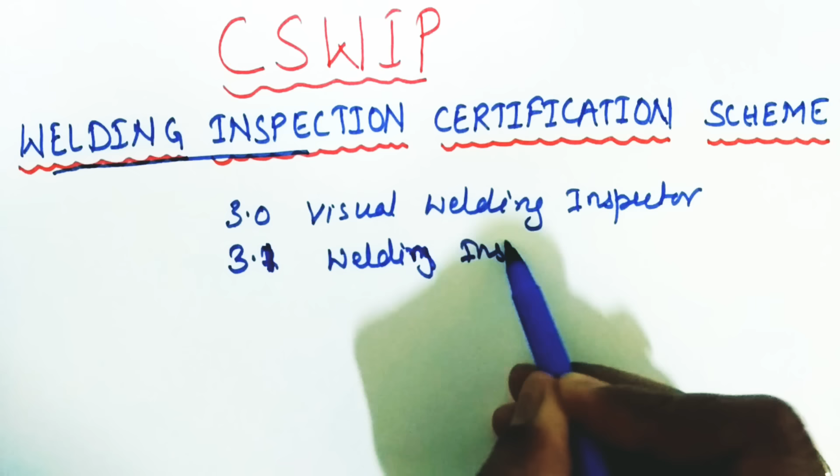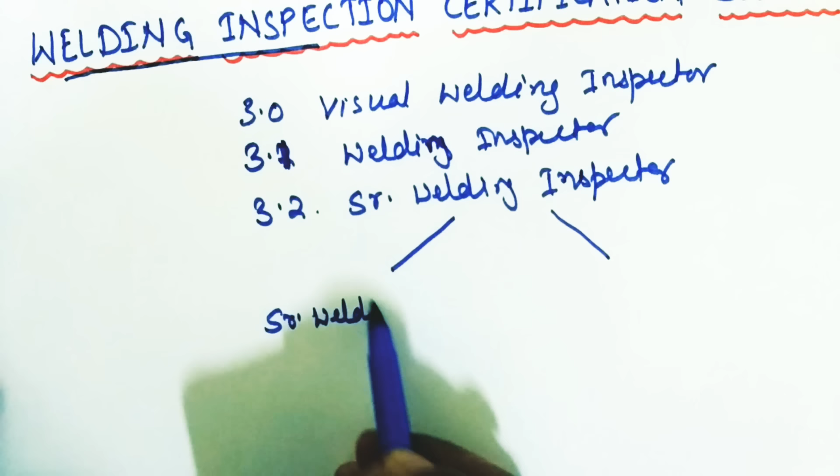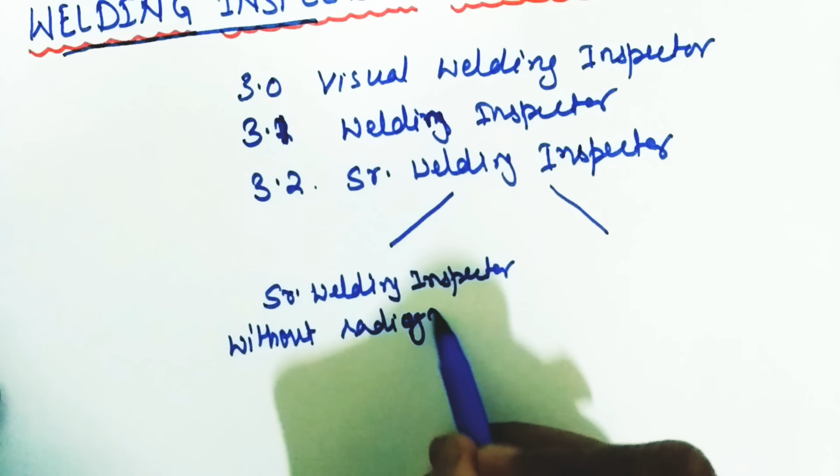And the third one is 3.2, Senior Welding Inspector. Friends, under this certification Senior Welding Inspector, we have two different certifications. The first one is Senior Welding Inspector without radiographic interpretation.

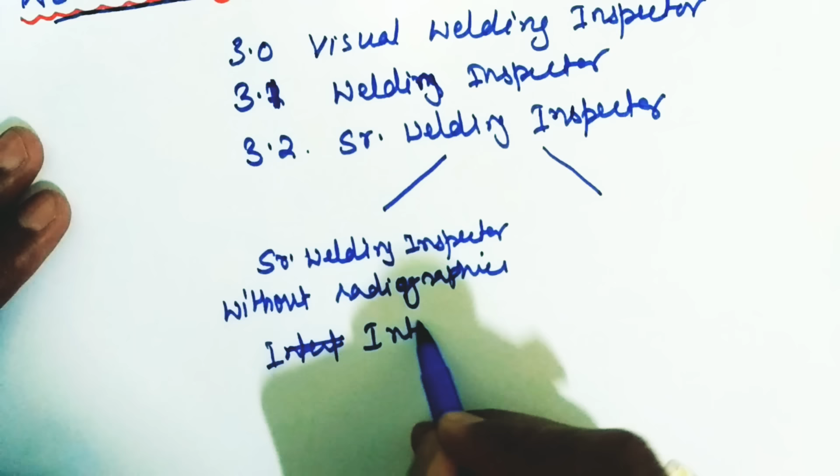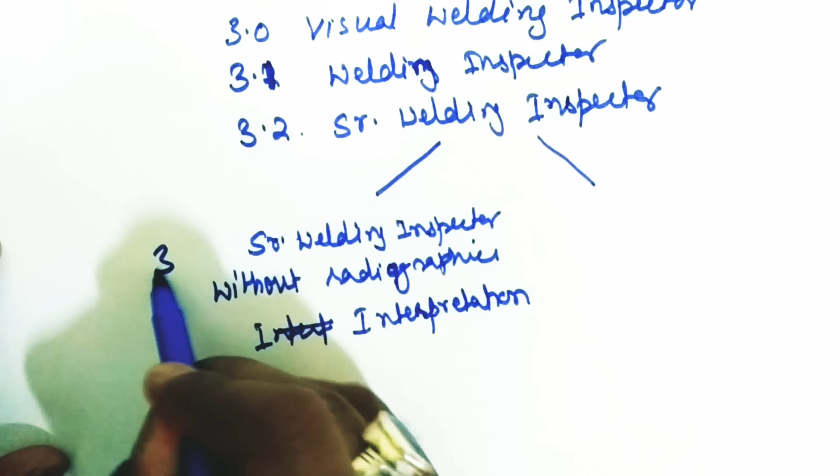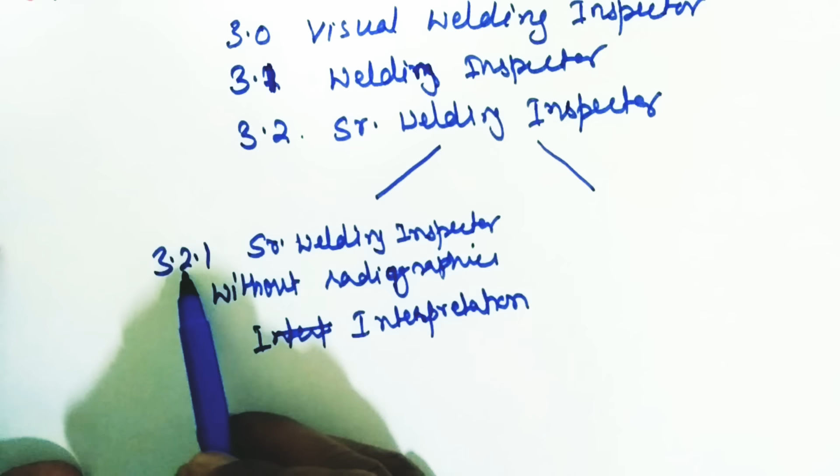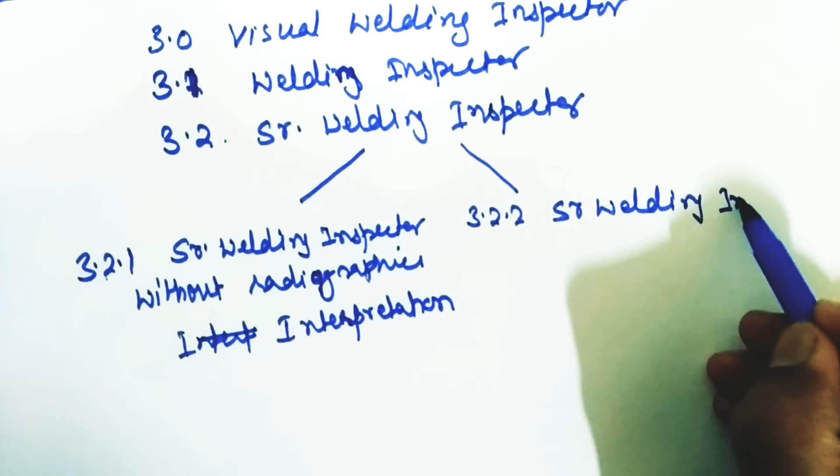And they have categorized it as 3.2.1. 3.2 is for Senior Welding Inspector, and under 3.2 we have Senior Welding Inspector without radiographic interpretation - this is 3.2.1. The second one is 3.2.2, and this is also Senior Welding Inspector, with radiographic interpretation.

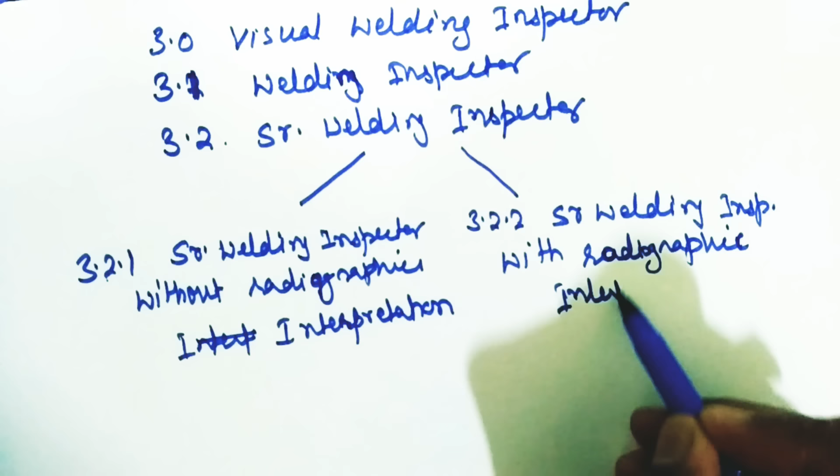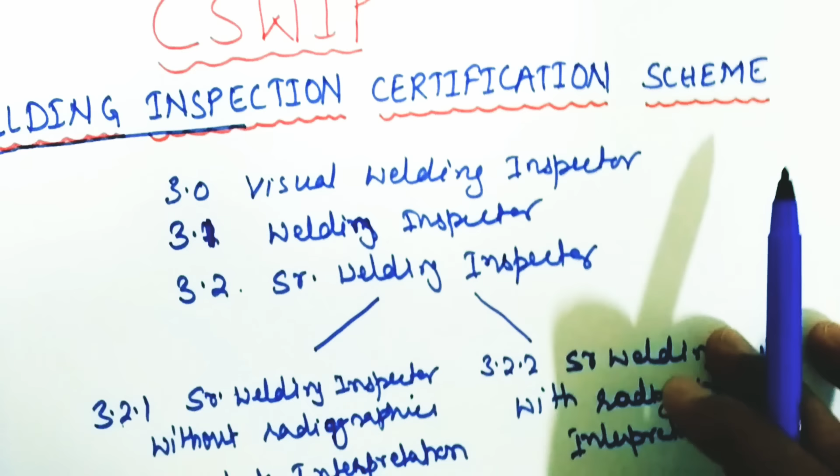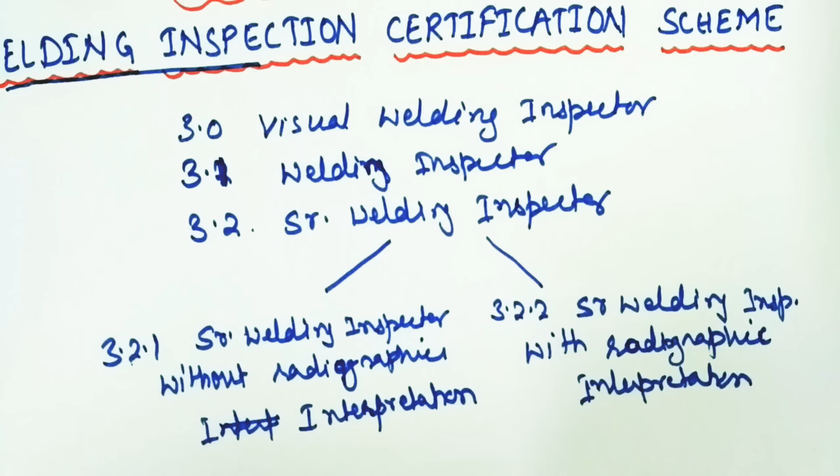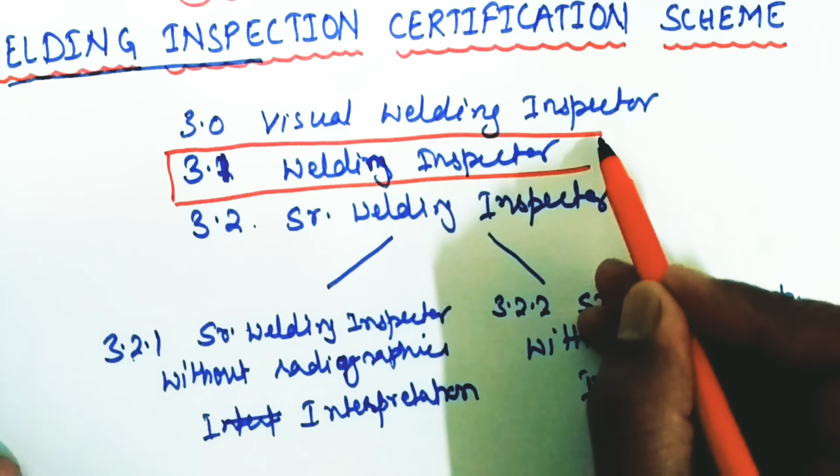So these are the three most common certification schemes provided by CSWIP for welding inspection: Visual Welding Inspector 3.0, Welding Inspector 3.1, and Senior Welding Inspector 3.2. Among these three, the second one, that is 3.1 Welding Inspector certification course, is the most popular certification course.

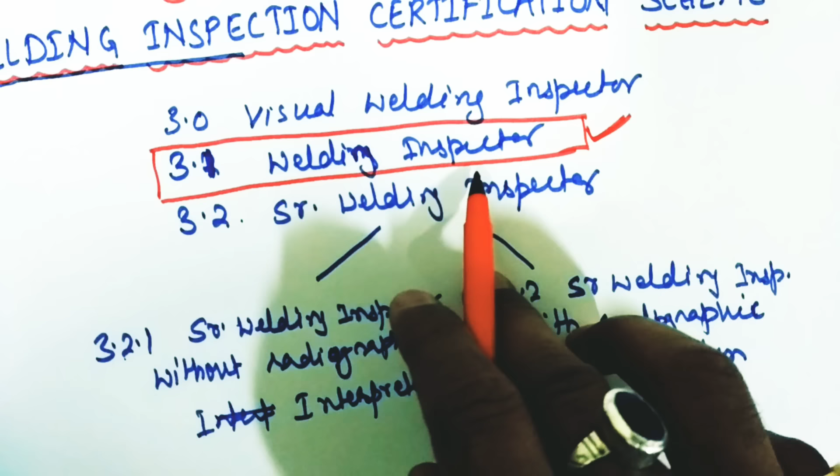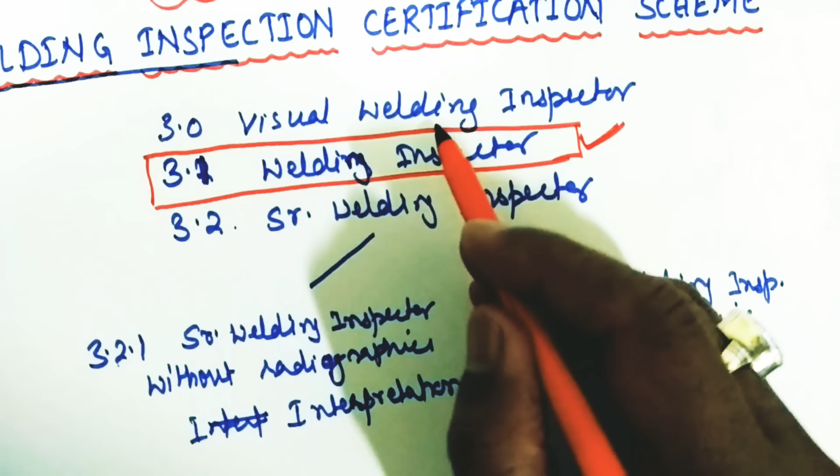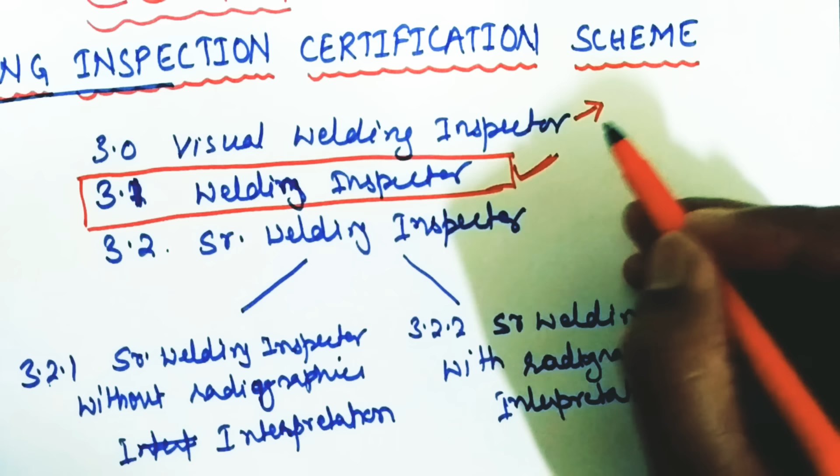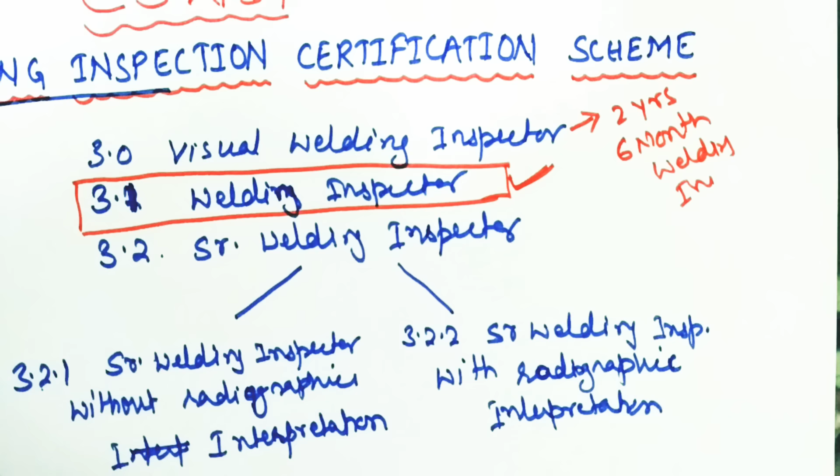So friends, now I'll briefly discuss the eligibility requirements. For Visual Welding Inspector, there is no specific eligibility required by CSWIP. However, they have recommended that the person who wishes to pursue this certification should be having some 2 years of industrial experience and 6 months of welding inspection experience. This is just a recommendation.

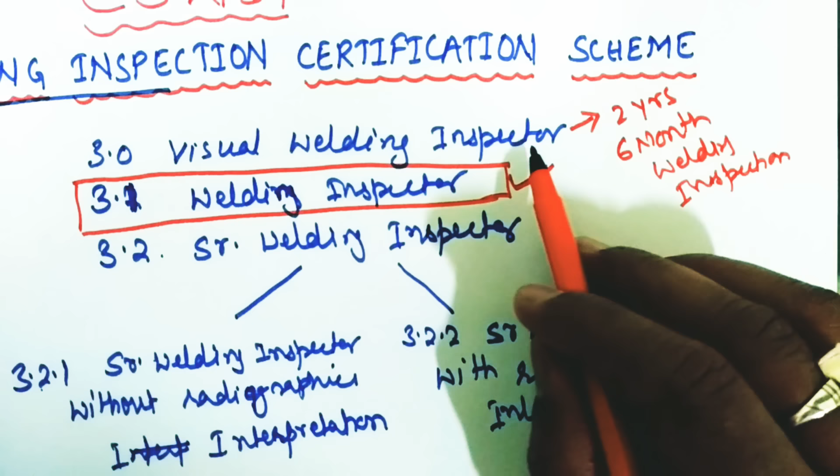However, there is no specific eligibility requirement - this is just a recommendation. This is for Visual Welding Inspector.

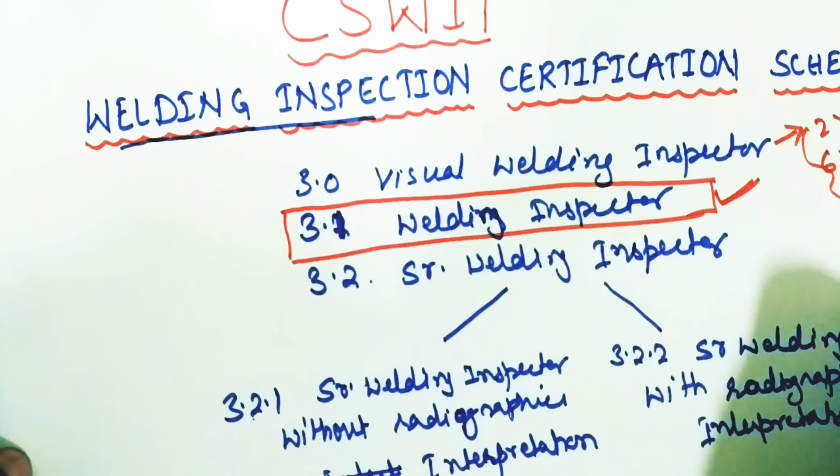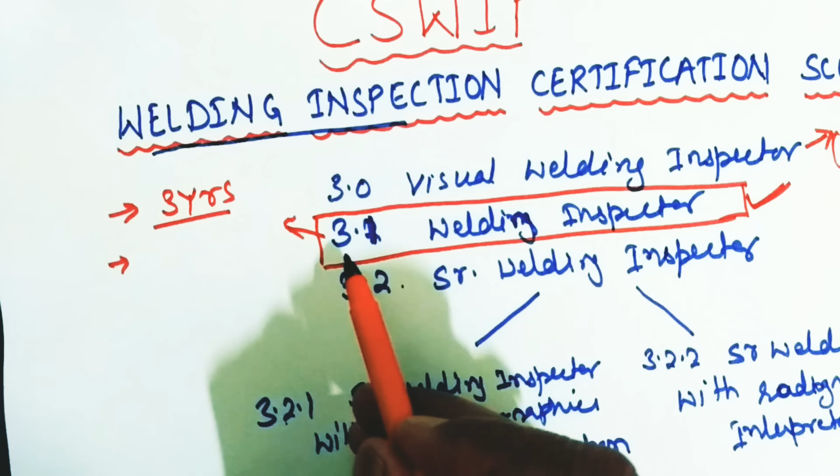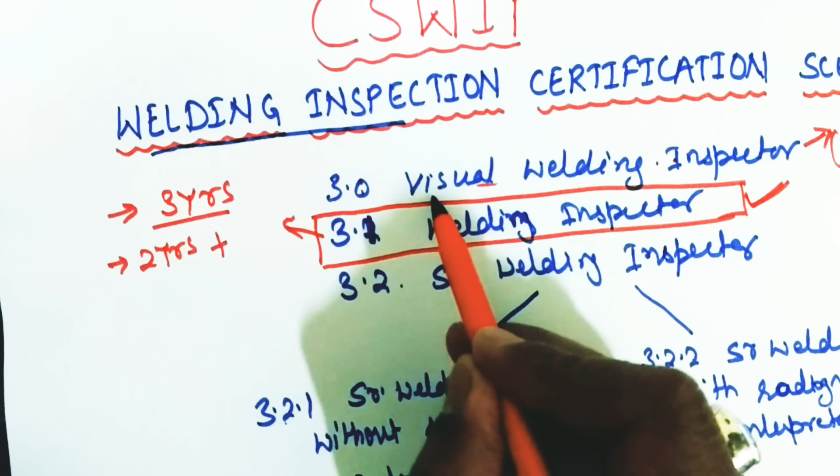Now we'll talk about the most popular one, which is Welding Inspector. The requirement for Welding Inspector 3.1 is, first, a minimum of 3 years of work experience in welding inspection. The second eligibility requirement is 2 years of work experience in welding inspection plus the Visual Welding Inspector course. Meaning, if a person has done the Visual Welding Inspector course plus 2 years of experience, they can be eligible for the Welding Inspector course.

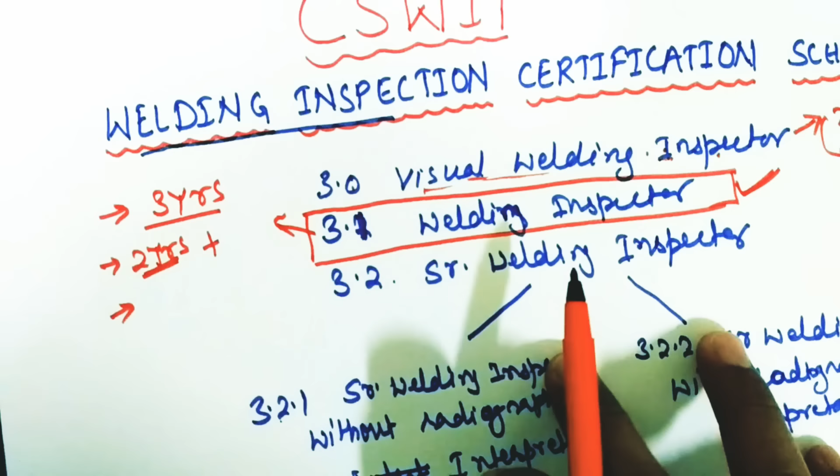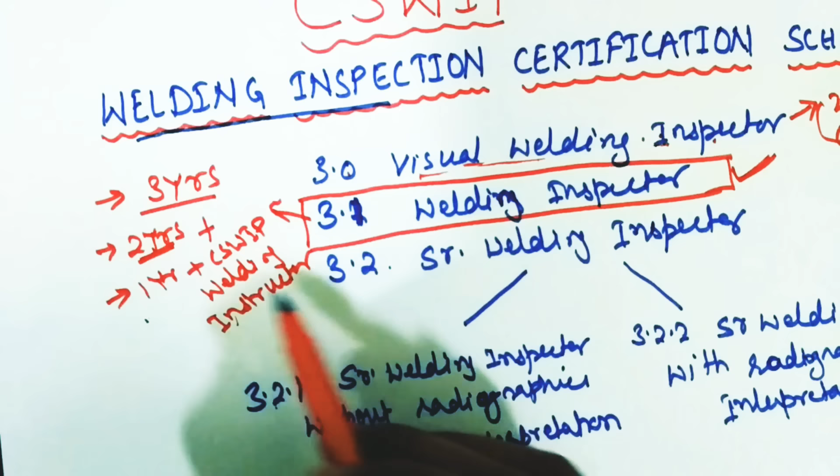The third and final eligibility requirement is 1 year experience in welding inspection plus a CSWIP welding instructor certificate. That person must be having a welding instructor, welding supervisor, or welding foreman certification with 1 year of experience. So these are the 3 requirements for Welding Inspector.

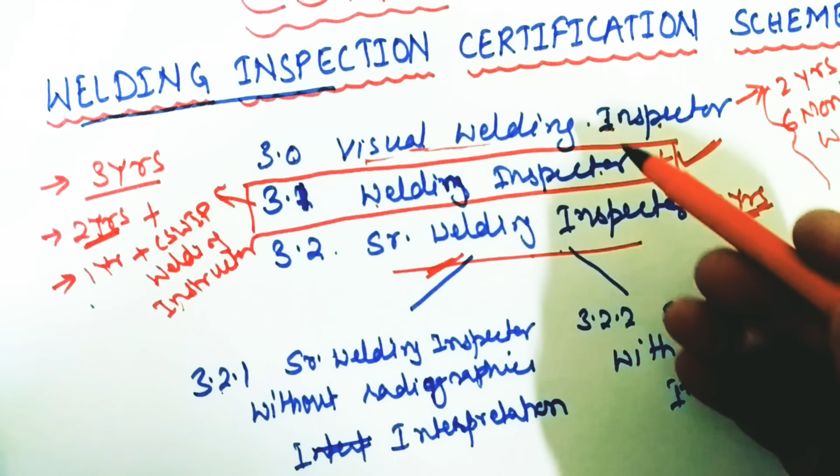Now for Senior Welding Inspector, the requirement is that the person who wishes to pursue this certification course must have done the Welding Inspector course plus 2 years of industrial welding inspection experience. Or, if a person has 5 years of authenticated welding inspection experience, then also they can go for Senior Welding Inspector. So these are the eligibility requirements for these courses.

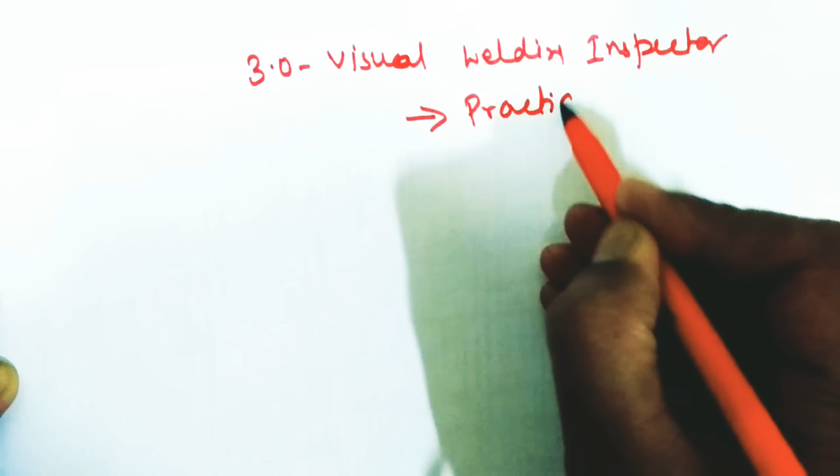Now friends, I'll talk about the examination pattern. What is the examination pattern? So friends, for Visual Welding Inspector, that is 3.0 Visual Welding Inspector, the examination pattern is only practical examination. There shall be only practical examination, two practical examinations.

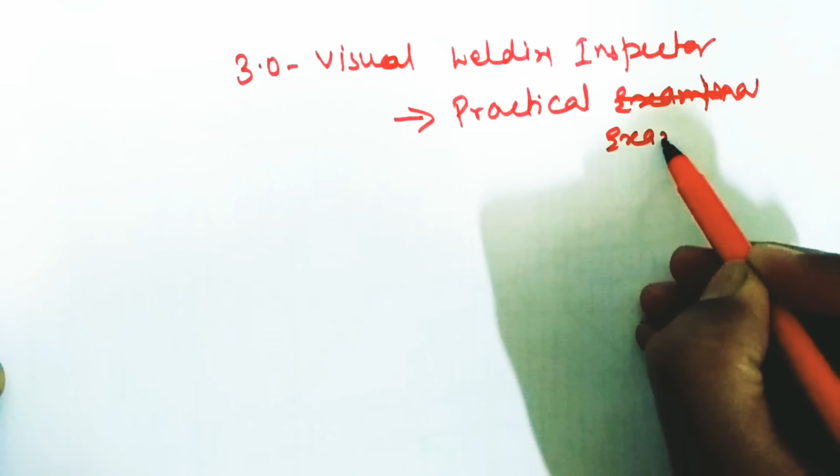So there shall be only practical examination, no theory part for visual welding inspector, and the passing marks is 70%.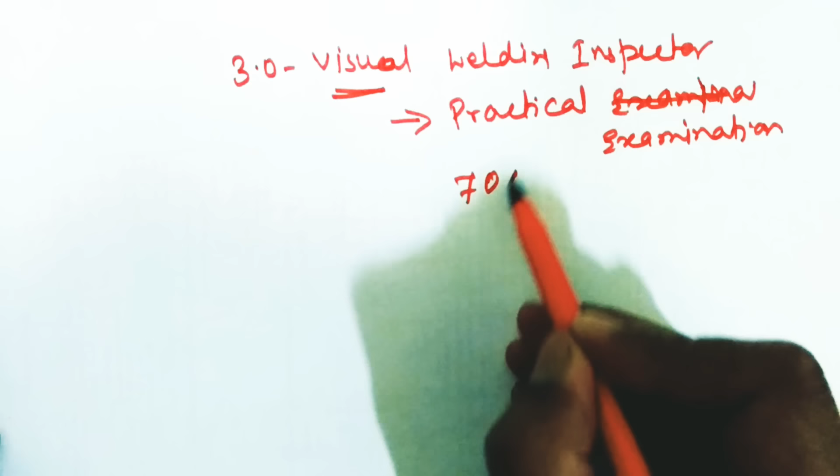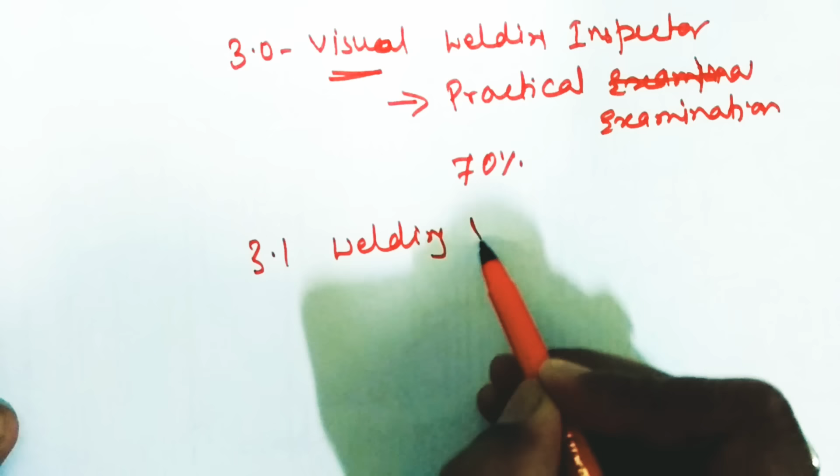Now we'll talk about the most popular one, that is 3.1 welding inspector. For welding inspector certification course, there will be theory part plus practical part, both. Written theory question paper plus practical question paper, both shall be there.

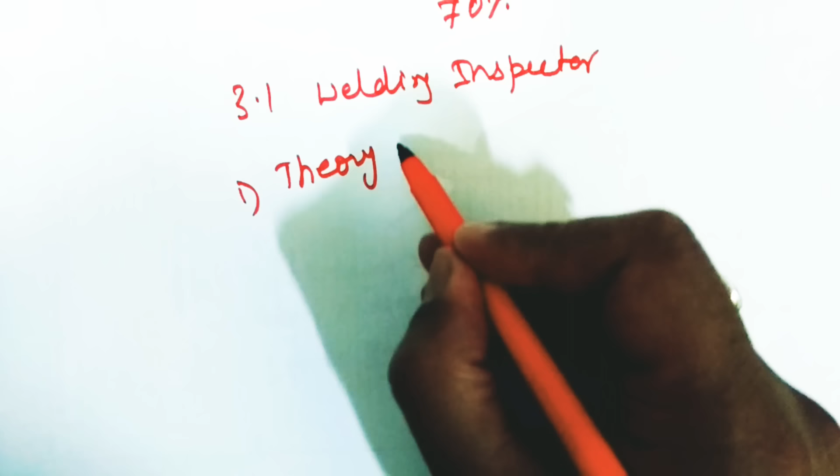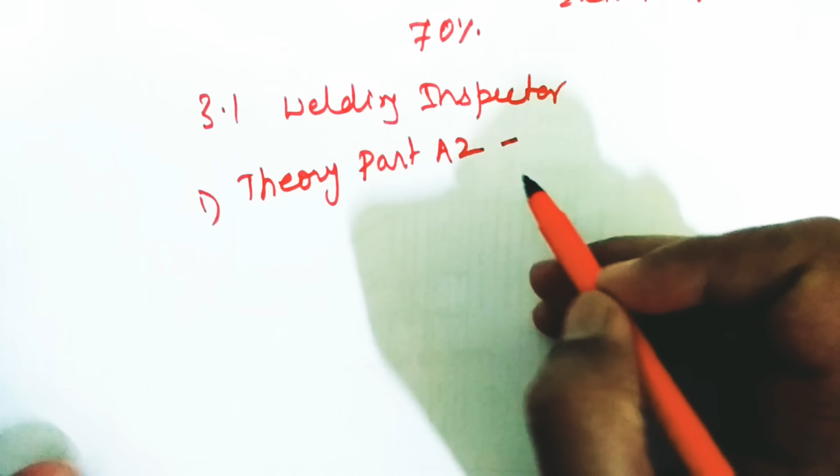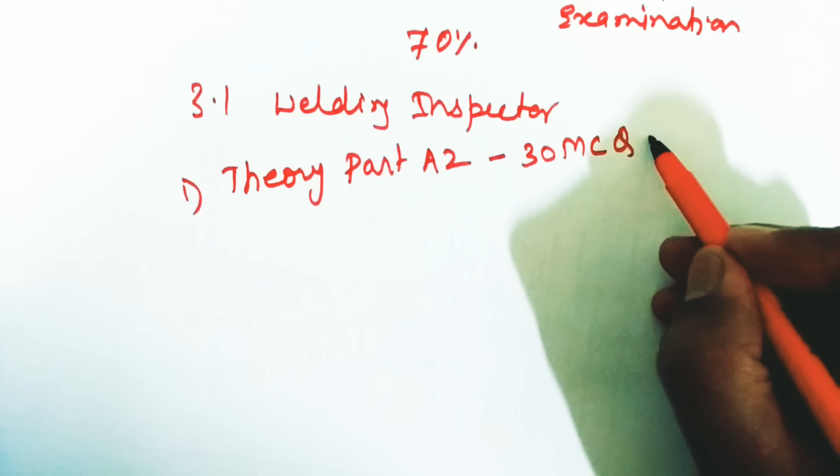In theory part, there shall be 2 theory papers. The first one will be theory part A2 - this is how they have mentioned in the CSWIP brochure. This question paper will contain 30 multiple choice questions, MCQs, and time allotted for this part is 45 minutes. We have to solve the question paper within 45 minutes.

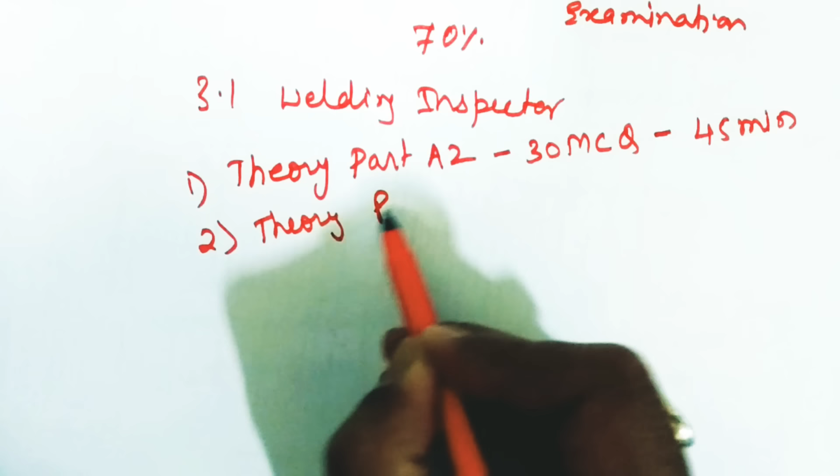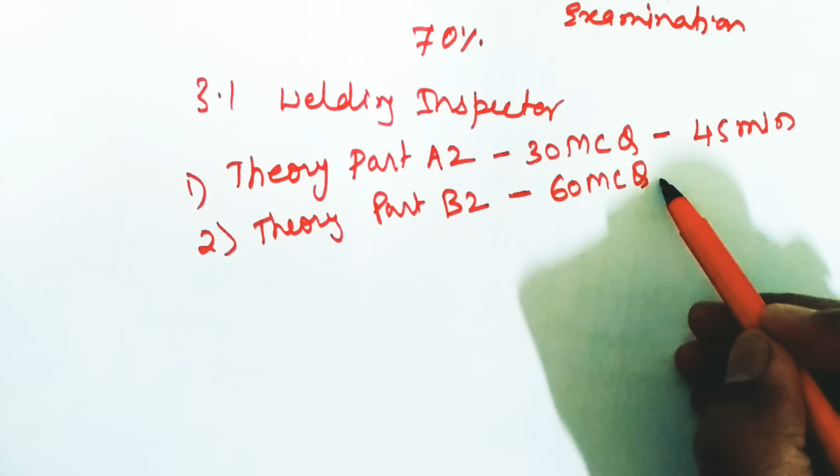The second theory part is theory part B2. This question paper will contain 60 multiple choice questions, 60 MCQs, and time allotted for solving these questions is 1 hour 30 minutes, that is 90 minutes.

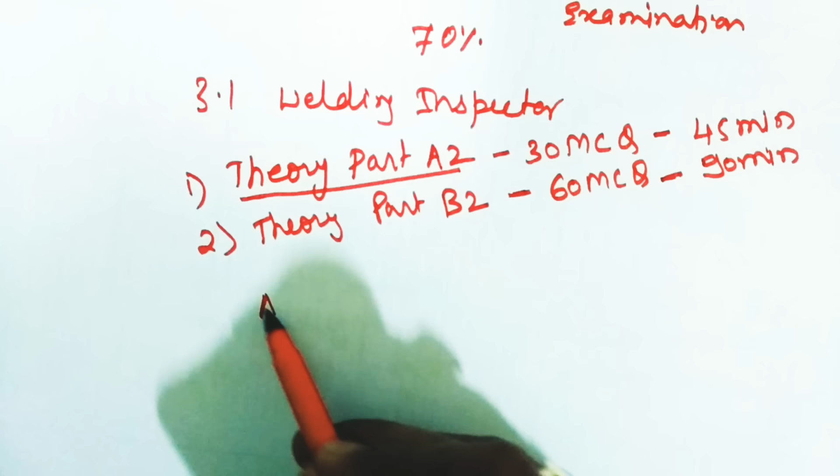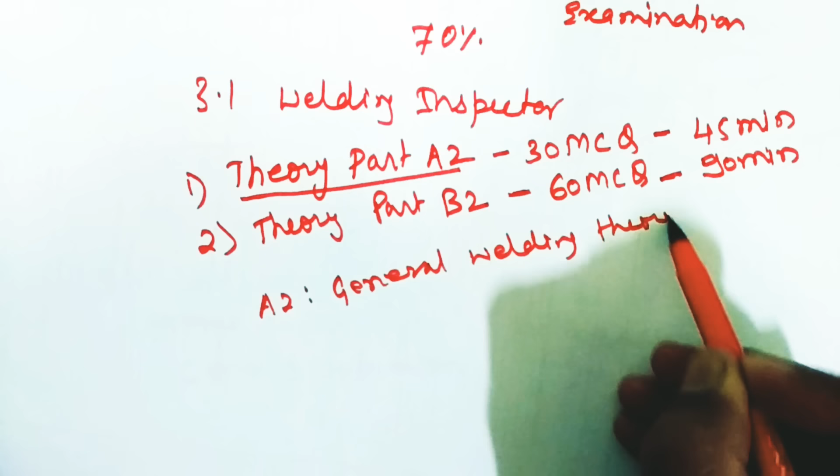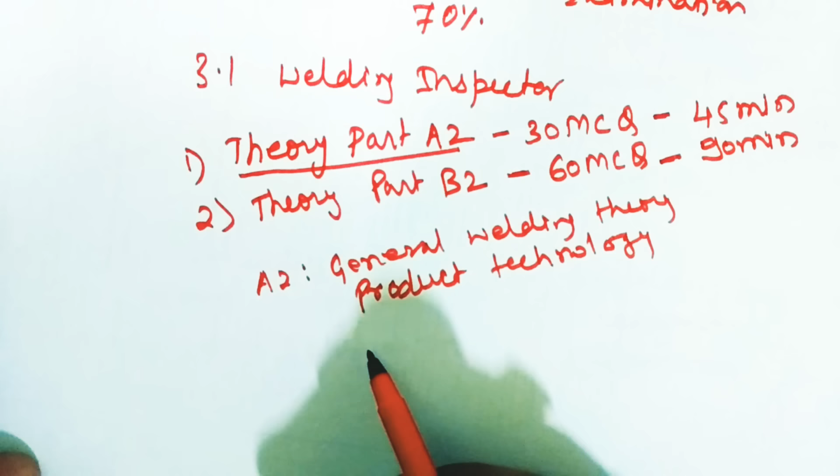Within 90 minutes, we have to solve these 60 MCQs. The theory part A2 will broadly cover general welding theory, product technology, and NDT. And the theory part B2 will cover specific welding technology.

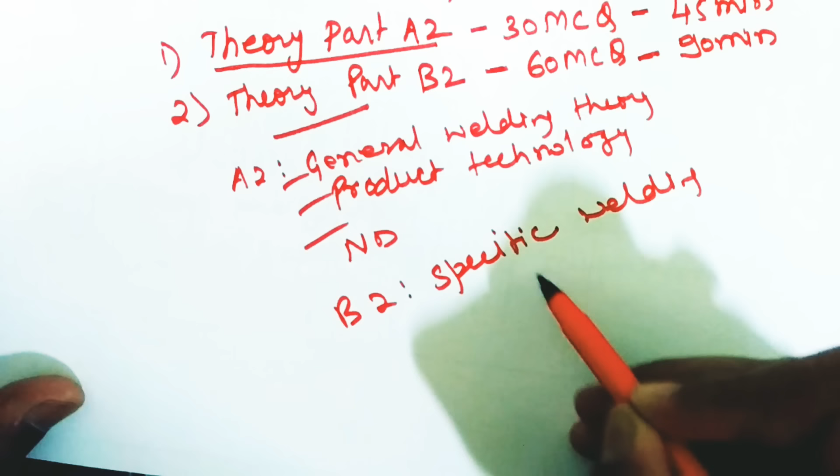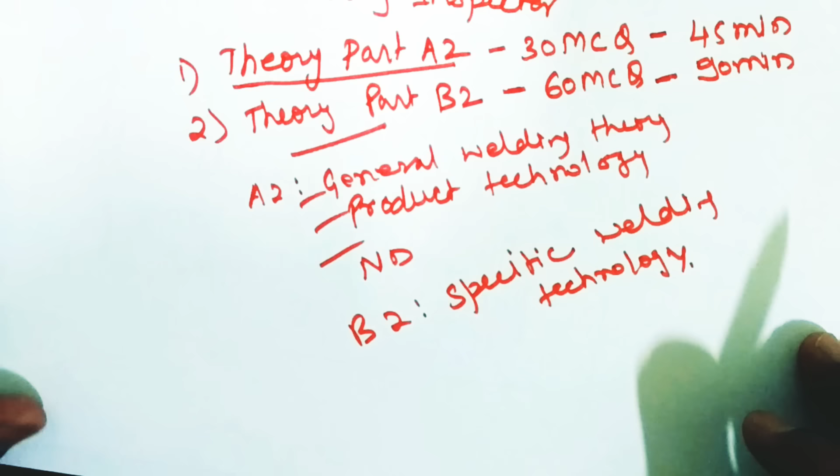So 2 theory papers. Now we have 2 practical papers also. What are those? I'll explain it to you. There shall be 2 practical papers. First one will be practical part A2. And in practical part A2, two practical papers will be there.

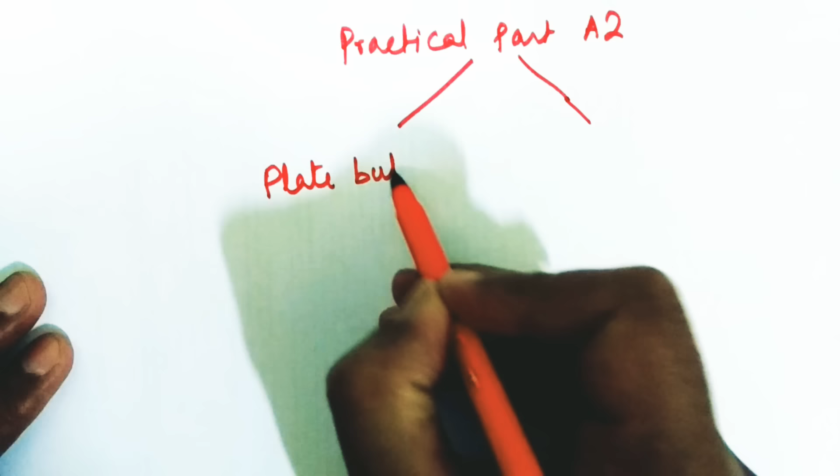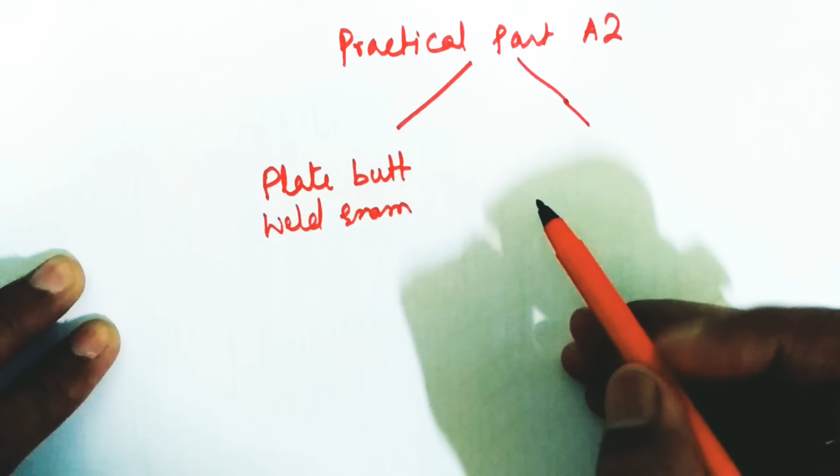First one is for plate butt weld examination, and the second one is pipe butt weld examination.

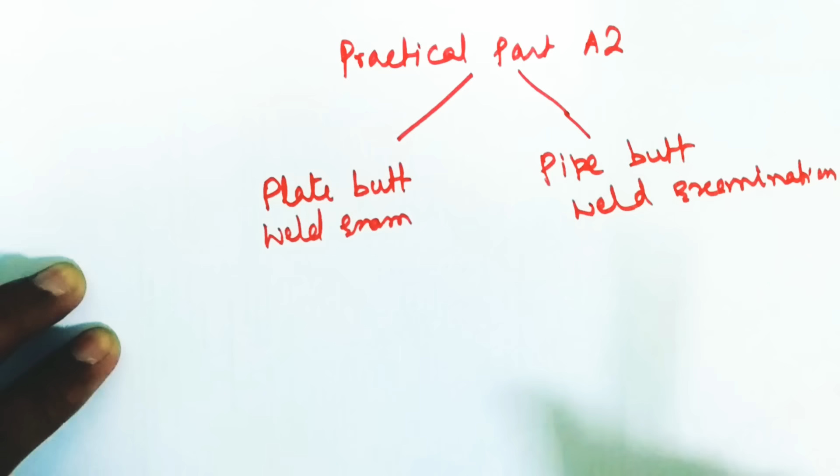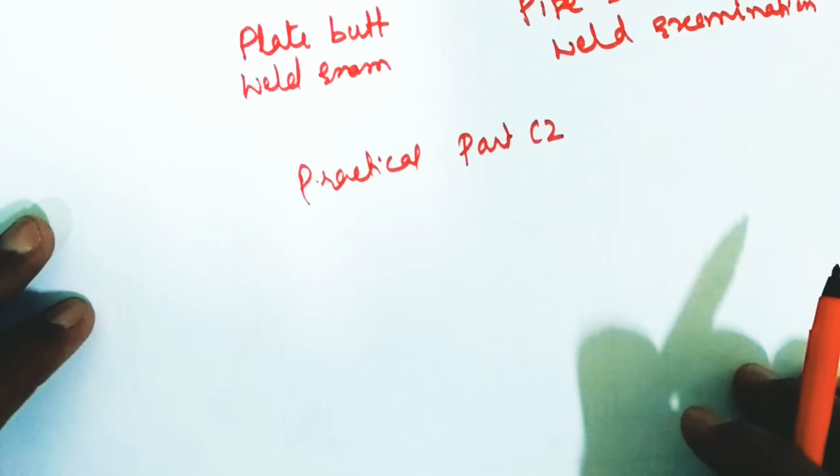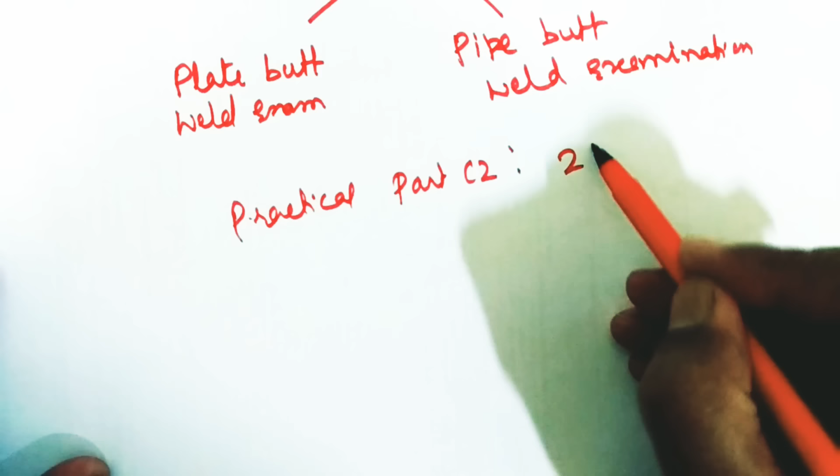So these 2 practicals are under practical part A2, and the second practical is practical part C2. Under practical part C2, destructive test sample inspection will be there. They will provide this for 2 macro, 2 bend and 2 fracture. So destructive test sample inspection will be there. This is practical part A2 and practical part C2.

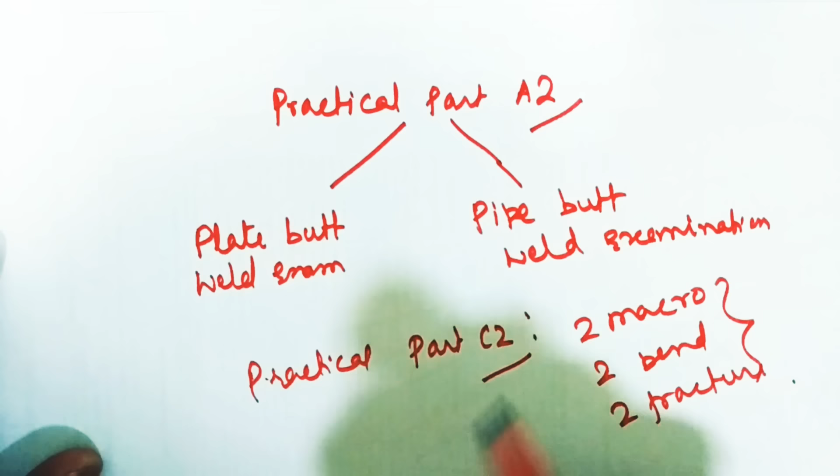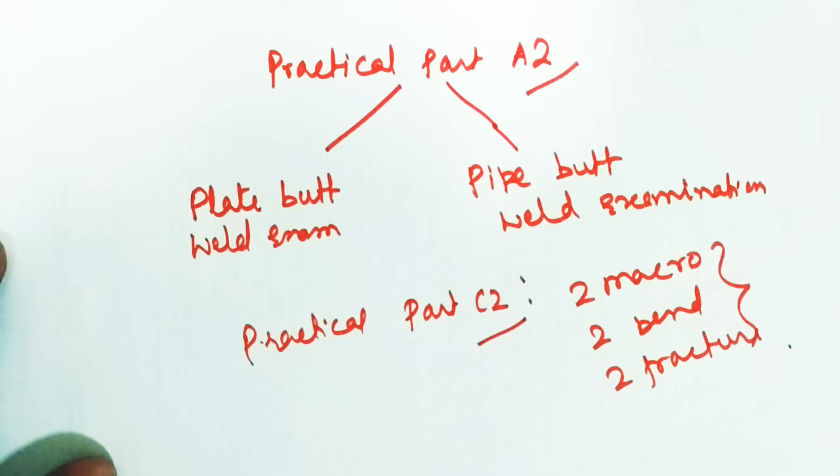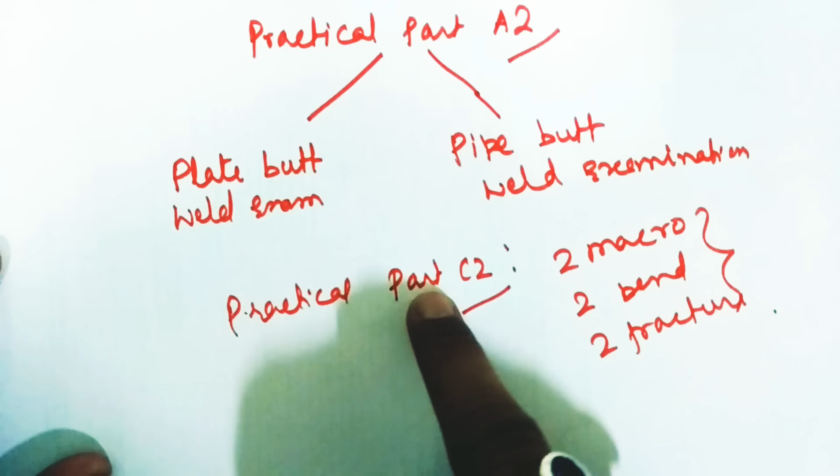These are 2 practical papers, but many people say there are 3 practicals. Why? Because they count this as 1, 2 and 3. But CSWIP has mentioned only 2 papers, and under part A2, these 2 topics are included, and under part C2, this destructive sample is included.

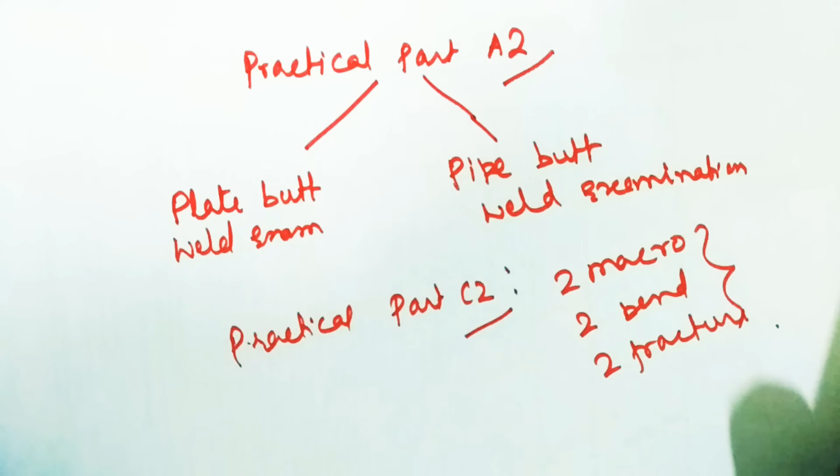So this is about the examination pattern. Now friends, many of my viewers and subscribers have asked me about the job prospect after CSWIP, and I have made this video to tell you about the job prospect also.

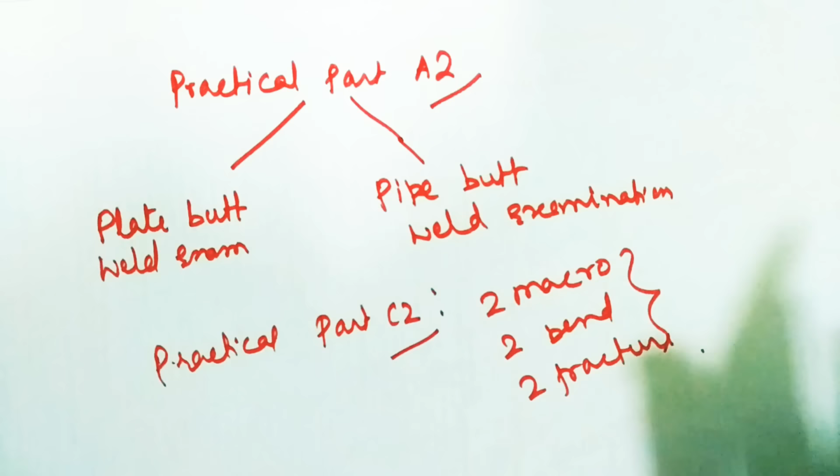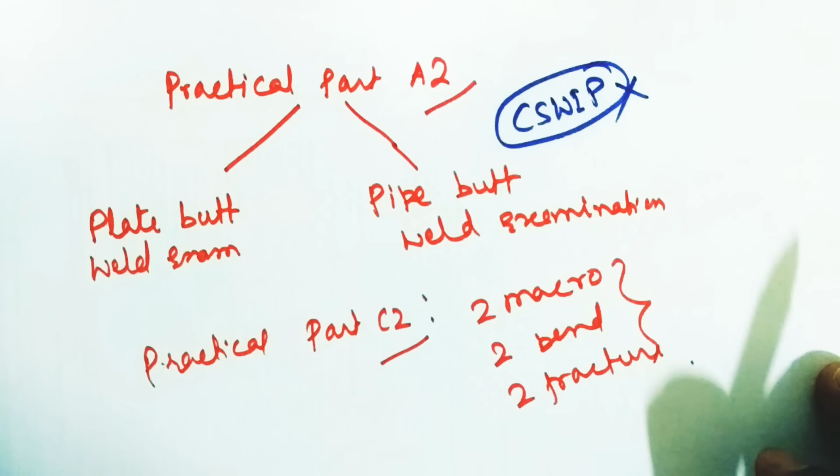It's very difficult to say about the job prospect, and one disclosure I would like to make: I have not done CSWIP. This is the disclosure which I want to tell you. I haven't done CSWIP, but many of my friends and colleagues have done CSWIP.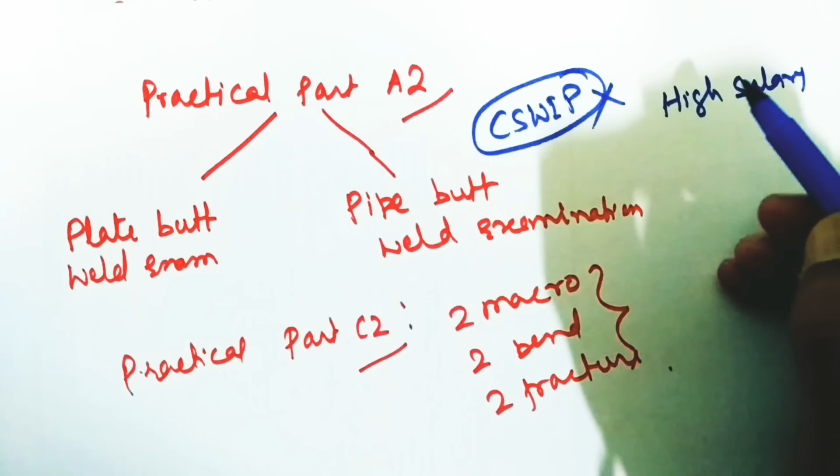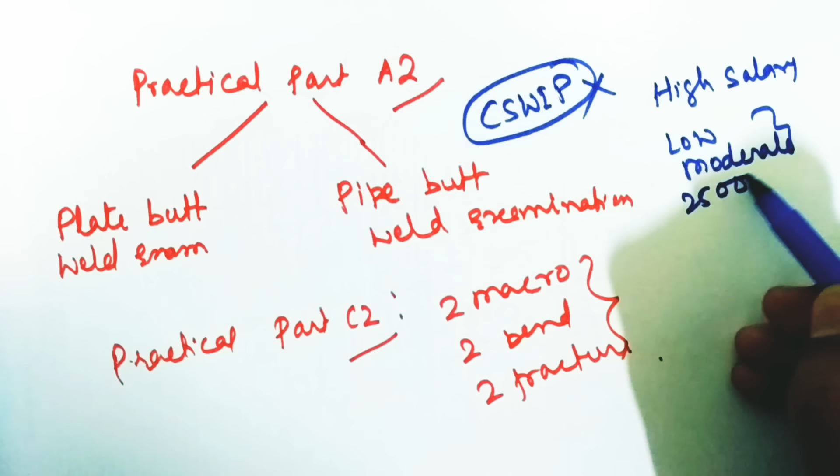And I have seen that after doing CSWIP, some of my friends and colleagues are getting very high salary. Some are getting between low to moderate salary. If I say low to moderate, I mean to say between 25,000 to 35,000 or 45,000.

So some of my friends are getting low to moderate salary, and some are unemployed also. Means after doing CSWIP, I have seen some of my friends unemployed, some getting low to moderate salary, and some also getting very high salary, 1 lakh, 1.5 lakhs. Some are getting 2 lakhs, 3.5 lakhs also.

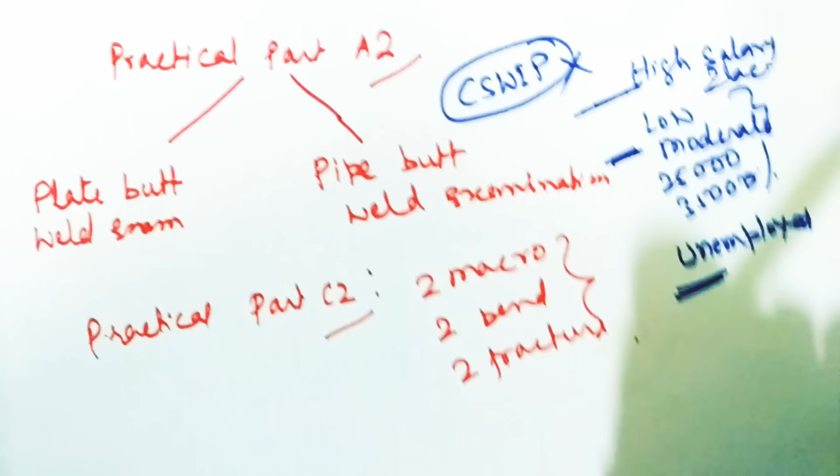So what I have concluded is that CSWIP never guarantees you a good job. It depends upon your ability only. If you are able, you can get a good job. If you are not able, you will not get a good job. Only by having CSWIP, a good job is not guaranteed.

Though CSWIP is a minimum requirement for Gulf countries and for abroad. Means CSWIP is an international certification course. So yes, it has got some value, and if you want to work in Gulf countries or in UK, then this CSWIP will act as a minimum eligibility requirement.

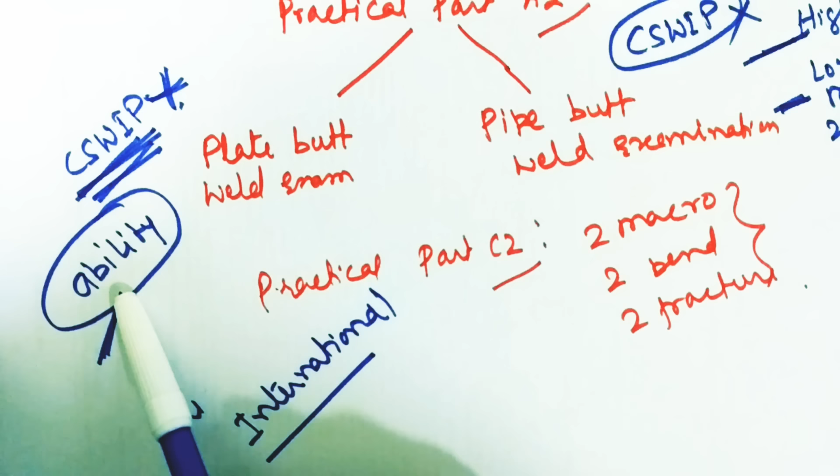But once again, I would like to tell you that only your ability, you must be able to answer the questions which are asked in the interview, then only you will get a job. Only just because of having a CSWIP certificate, a job is not guaranteed.